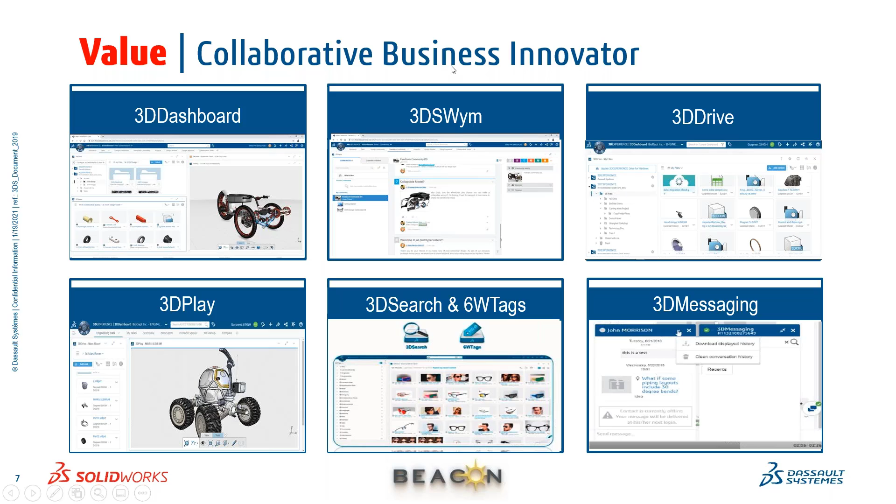So what is the 3D experience platform? I'll take you through it live. Let me switch to my browser first. As you can see, I am on this particular browser, and one thing I want to emphasize here is that to work on this environment you don't need to have a full-fledged system to access the data, to view the data, to review data. You can work on thin clients, because the only thing required here is a good internet connection and a browser. So from the browser you can access the 3D experience platform through the 3D passport login.

Let me just log into my credentials here. So as I've logged in, this particular page would load up, and the first thing that I would see is the dashboard. So this is the 3D dashboard.

So dashboard is something where I can get a bird's eye view of everything: what are different activities that are going around my organization in different teams, or what are different tasks that are involved, what is going around the world with my vendors, with my competitors. I can get a complete feel from this particular thing. A single unit of data, a single unit of information, where you can find here, and you can have multiple dashboards.

So this is an example of a dashboard, as you can see here. I have this dashboard, and there is one more. You can switch between different dashboards from here. I can switch to this particular dashboard called the Resemin Bolter 77D design and development dashboard, which will focus on this particular webinar. And on the 3D experience platform, you have this compass, which basically consists of different roles, but we are focusing on this particular role called collaborative business innovator, which consists of all these applications.

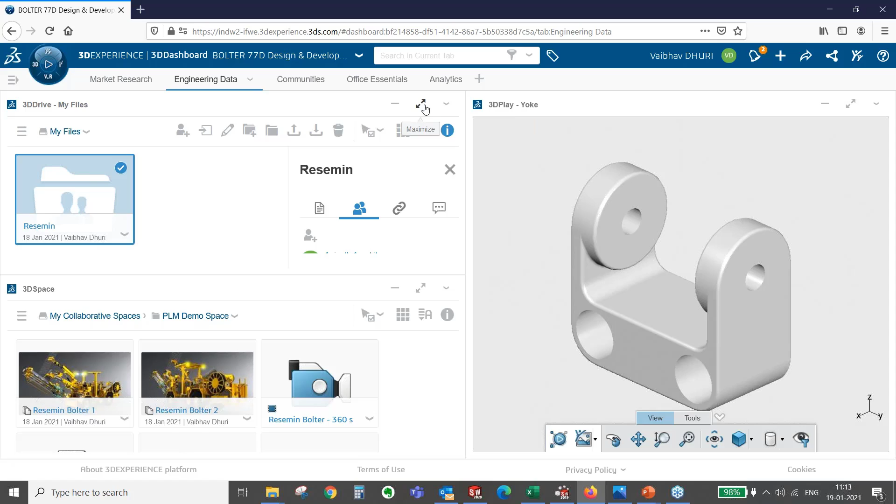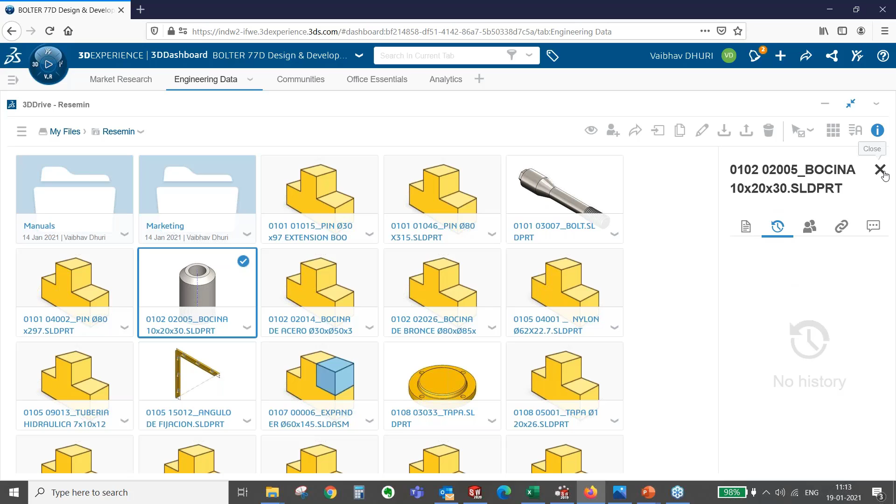At the same time, you can also access the data such as the parts. If you have a particular part, you can find the history of how that part was developed. There are different versions saved on the platform, so you can check what the previous versions are, and you can also access those previous versions, or replace them whenever you want. So these kinds of flexibilities are provided here.

Next application from the 3D Experience platform, which is very important, is 3D Play. 3D Play is basically a review application wherein any data from this 3D Drive can be directly opened onto the 3D Play application, and here any kind of design review can be done.

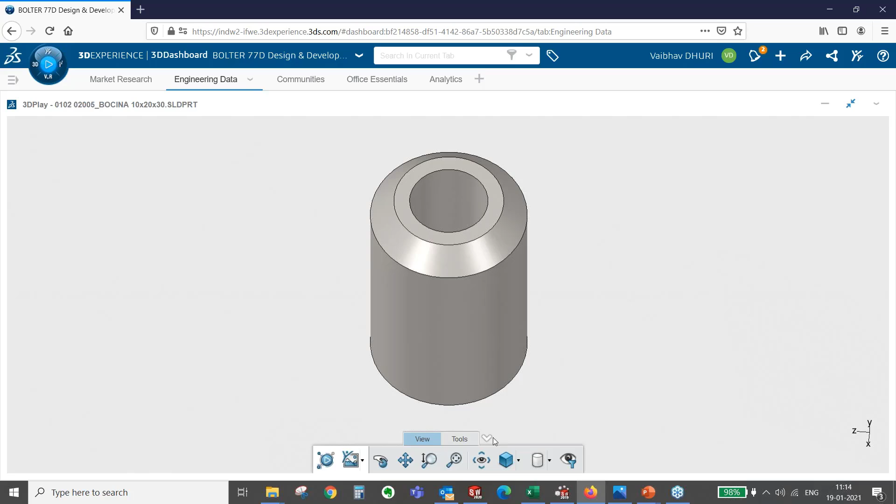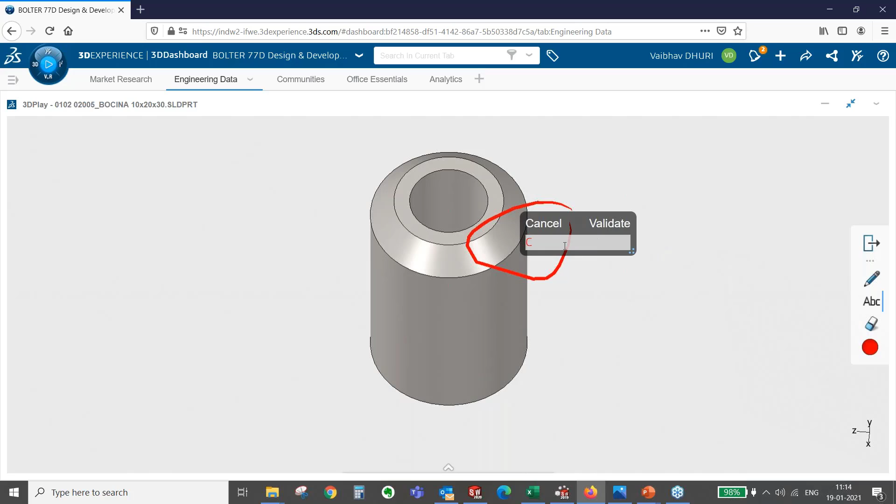Let me just maximize this. So you have full flexibility in moving, panning, zooming, rotating this particular data, and if you want to inspect this, we have this measure tool to quickly inspect it, and you can take different sections. You can add different markups. So any kind of design review can be done from this tool called 3D Play.

And the best part is, if there is any kind of markup or change, that can be shared through the collaborative environment with multiple users through the communities. Communities is something which the 3D Experience platform has - basically it's a social networking for your organization, done through this application called 3DSwym.

3DSwym gives you access to have different communities, similar to what we have on LinkedIn or Facebook. Basically, you can create communities for different projects or for different teams. As you can see, I have here a community called Design Team for Mumbai.

Basically, this consists of all my design team members from Mumbai. Now we were talking about a particular project here, the Resemin Bolter 77D development. Let's go through and follow up with all the activities we have done. So here, for the Resemin Bolter 77D, we have started the development, and as you can see, I have posted

a post here naming it as: a new NPD is required for roof bolters, and we can take references from the previous product ranges. I've created this post similar to what we do on social networking platforms, and I've also shared an image - you have the flexibility to share an image or video directly on the platform inside the communities. So I've shared a previous model of Muki AFF, a similar range of product from the same company, and we need to develop this Resemin Bolter 77D based on references from Muki AFF.

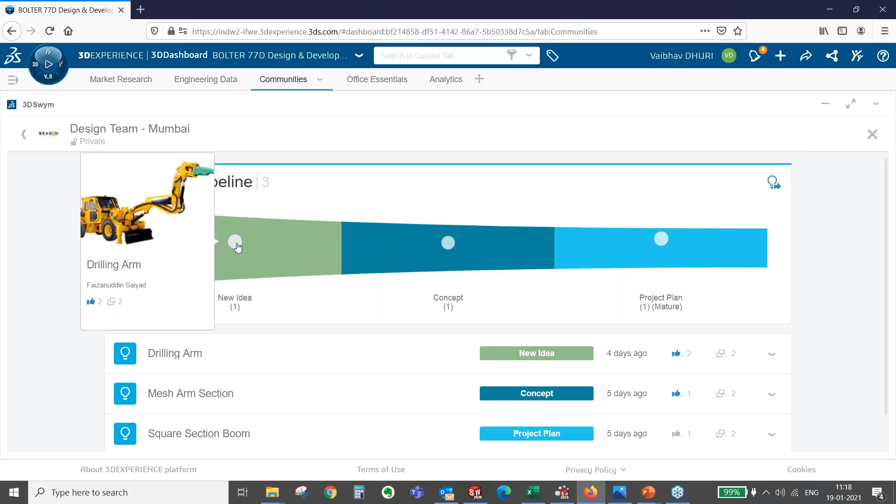If I check here multiple ideas, you can see this is the ideation pipeline, wherein I have this particular drilling arm idea by Mr. Faizanuddin Saiyad, which is still in the new idea stage. Then I have this mesh arm section, which is in the concept stage. And then we have this project plan idea, the square section boom. This ideation pipeline basically helps you to focus on the views of different team members and channelize them based on the need.

So there are a couple of ideas shared and a couple of comments. I can like those comments, I can reply on those. Apart from that, Mr. Faizanuddin Saiyad had posted that let us start working on the boom assembly, since we have developed all other portions taking references from the previous assembly. So he has given me a comment to please align all the tasks.

Now tasks can be aligned through the 'we do' task in the communities. So here from the Swym community we have something called 'we do task.' From this, I can add multiple tasks to different team members. You can see I've assigned a CAD model development task to myself, where we need to develop the knuckle for boom assembly, and now the task is in the to-do stage. We'll see later how these stages work.

Then I have assigned a task here to Mr. Anirudh Ayachit to check the previous design with respect to 175 kilonewton static loading. He has already completed this task, as you can see here. So these are the multiple stages: to-do, in work, or completed. When I'm going to work on a particular task, I can shift that to the in-work state so that all the assigners are notified that I am taking up this task. This helps you plan a project completely.

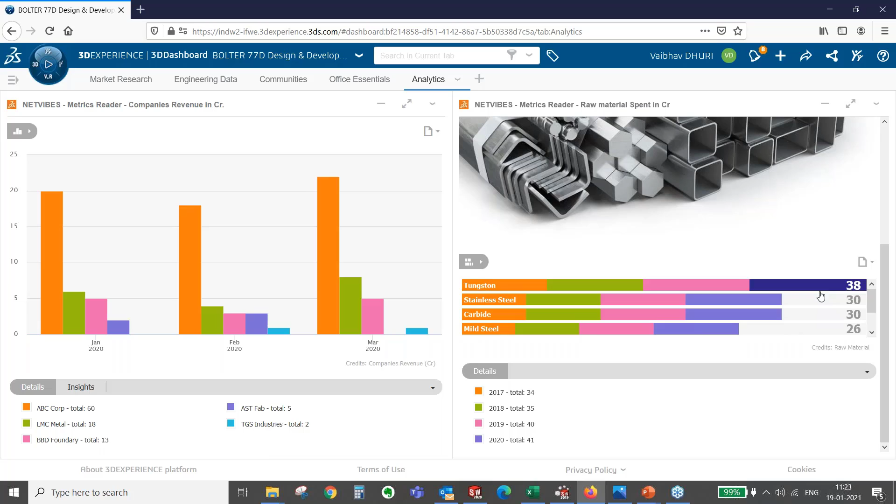I also have one more reader here, which basically states the raw material spent in crores over a few years. So from 2017 to 2020, how much we have spent on these different raw materials: tungsten, stainless steel, carbide. That is given here, and these insights can also be understood from here.

Let me switch back to my presentation. Now we'll see how we can integrate the 3D Experience cloud-based platform with the SolidWorks 3D CAD. We will start working with the part modeling and develop the knuckle.

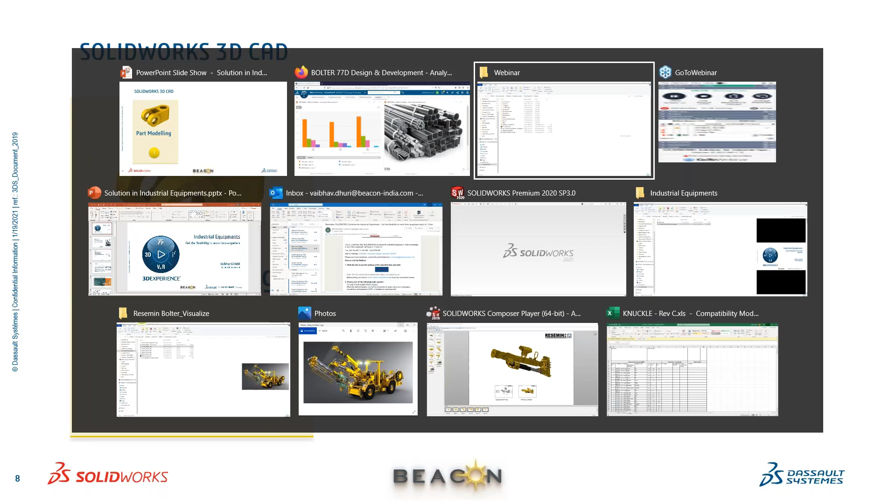Let me switch to my SolidWorks window. As you can see, I have my SolidWorks window here, and on this window, I have this 3DEXPERIENCE task pane, which basically consists of the same thing that I have on my browser. From this compass, I can access different applications, including the 3D drive, which consists all the data and different folders shared with my team members.

Something that would give me a bird's eye view is the tasks. From here I can actually access what my task is, and it helps me focus on a particular thing from the project. So here you can see I have this to-do task, which is the CAD model development.

While taking this task, I will transfer it by dragging this into the in-work stage. Every other member would be notified that I've changed that to in-work stage, so that I am assigning it to myself. I'm taking that particular task.

Now the different things I need to do to complete this task are also given inside the task. If I open this particular task, there's a brief description that I need to develop the knuckle for the boom assembly and the assembly as well. Here the community for this task is the design team community, and here is the priority, which I've now changed to in-work stage.

I can also work on how much percent I've completed this task, so that my design manager would be notified of what stage this is completed at. You can also plan the end date, so that after the end date, if I lag this out, I would be constantly notified that I'm lagging on my task. Now let us go ahead and drag this.

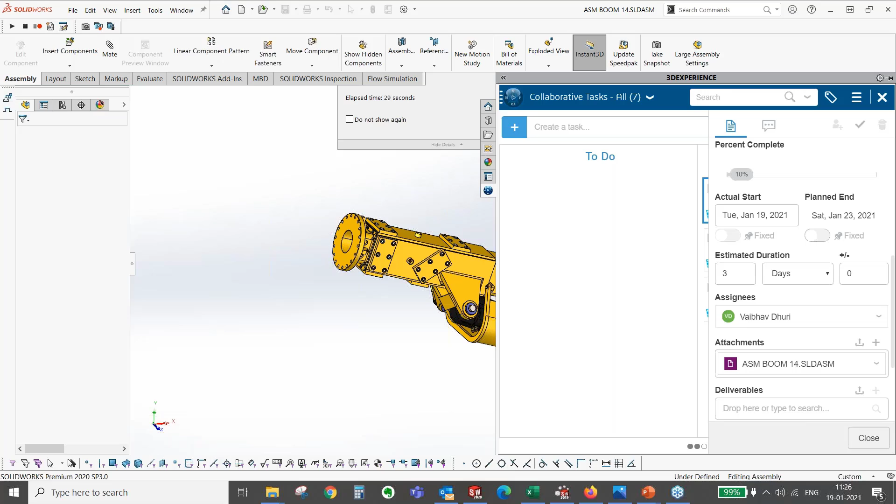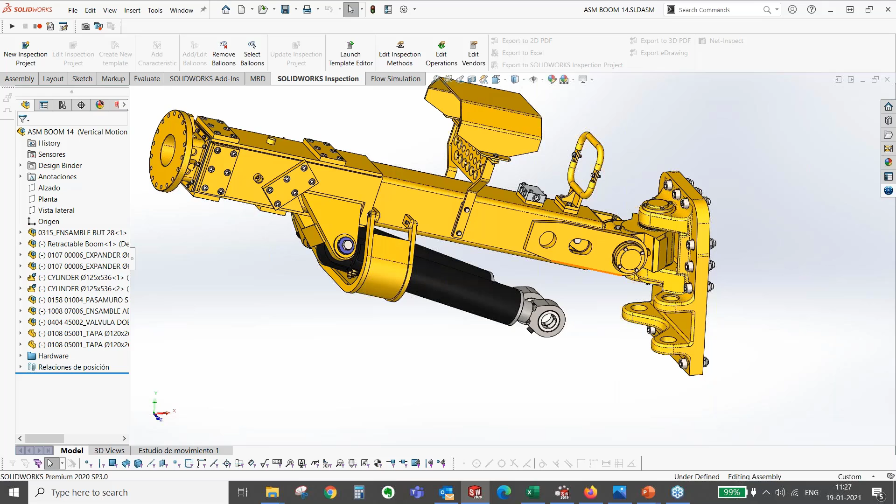As you can see, I've opened this assembly, which I need to work on, and it's still given inside my task pane. From here I can access this data, so let me just hide all the content. Here I need to develop this knuckle.

Let us take a reference from the boom assembly: a knuckle with an ID of 65 mm. Let me develop a new part here, taking a particular template.

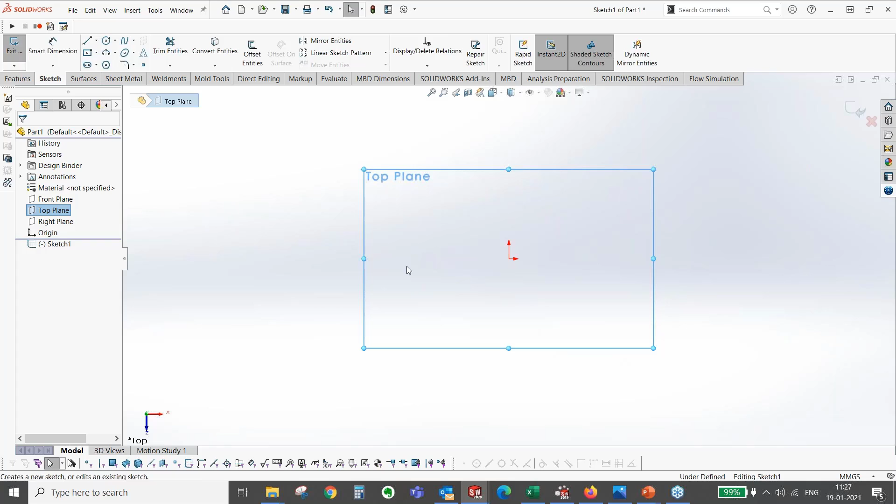Here I'll just develop this particular sketch on the top plane. I'll add a circle here of 65 mm and an outer boundary of, let's say, 120 mm.

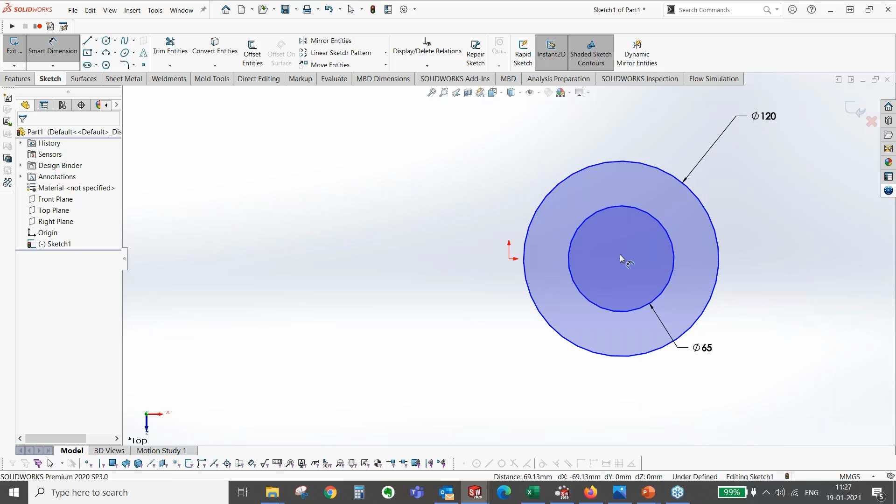I'll just move this here, add a constraint here, and then exit from this sketch and directly convert this into 3D. I'll just extrude this out, and let's say about 125 mm would be fine.

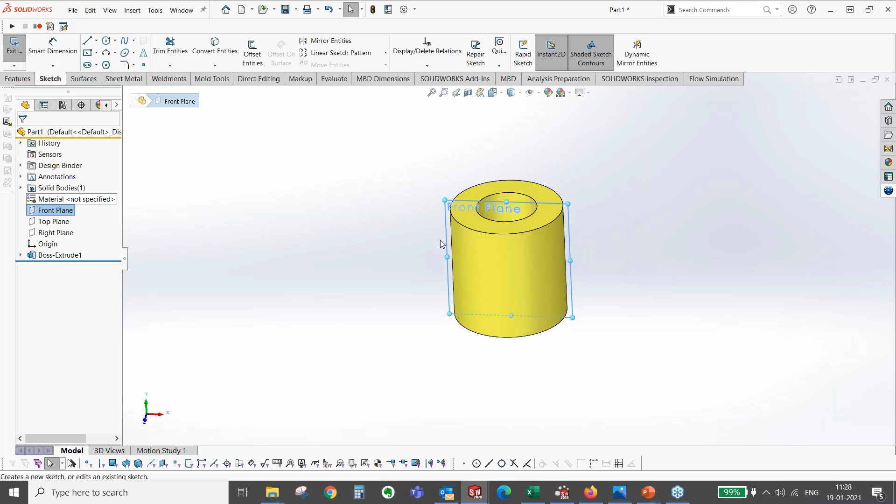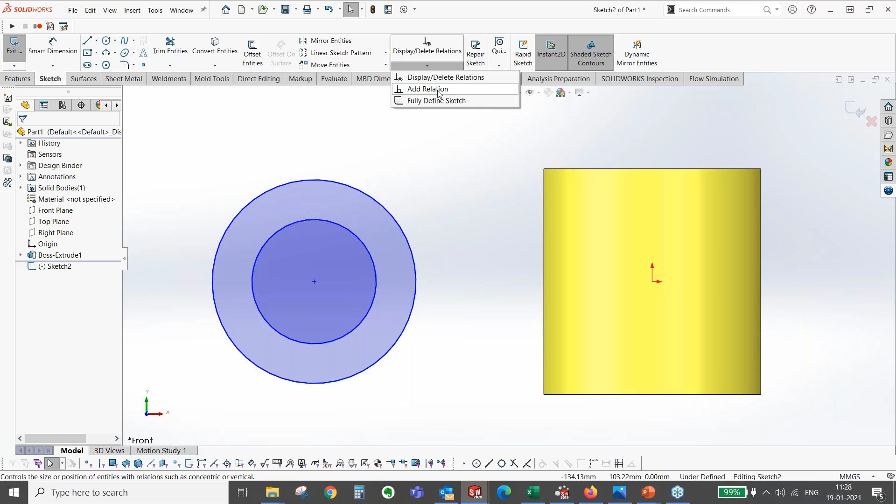I'll sketch on the front plane here, adding two more circles, concentric, and instead of creating the dimensions manually, I'll just go into the fully defined sketch and all the dimensions would be ready on my screen where I need to develop them. I'll make the inner diameter 65, the OD 120 mm, and this distance about 165. So I've added these dimensions.

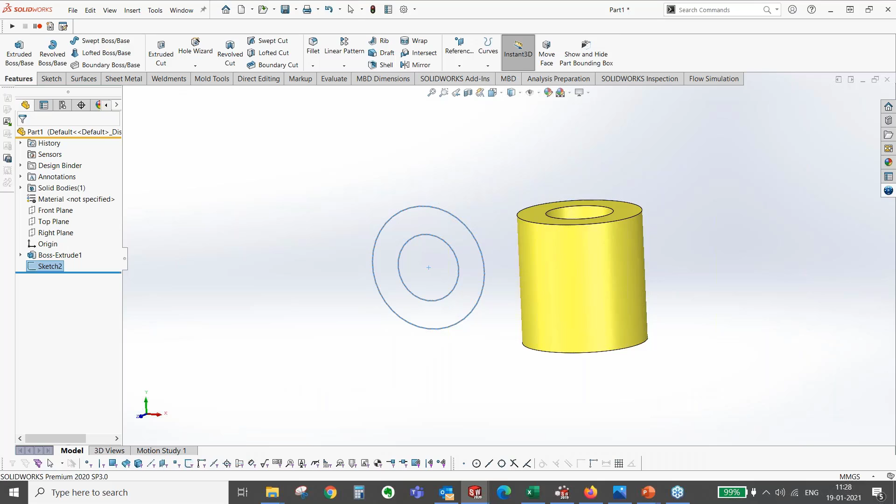Let me go ahead and convert this into a hollow cylinder. I'll just switch this, and let's say I'll put this about 150 mm. Now these are two cylinders, and I need to connect them.

So I'll start working on the top plane again. I like to work with center lines, so I'll just add these center lines here.

Okay, a horizontal one and a vertical one, and then taking references of this, I'll just select this particular edge and convert that into a circle, so that anytime this particular entity changes, my sketch reference would also change.

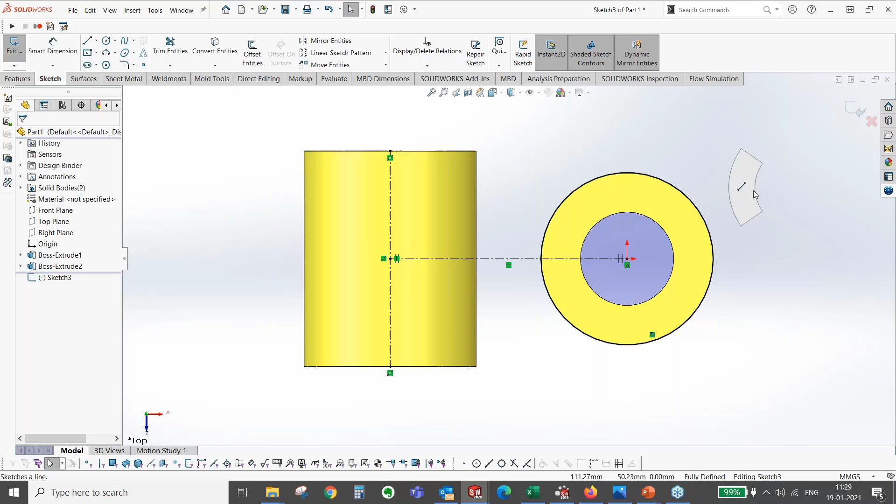I'll add one more line here. Before going to that, this dynamic mirror entity would help me mirror out sketch entities. So I'll just choose this particular line here, and as you can see, this is being mirrored directly.

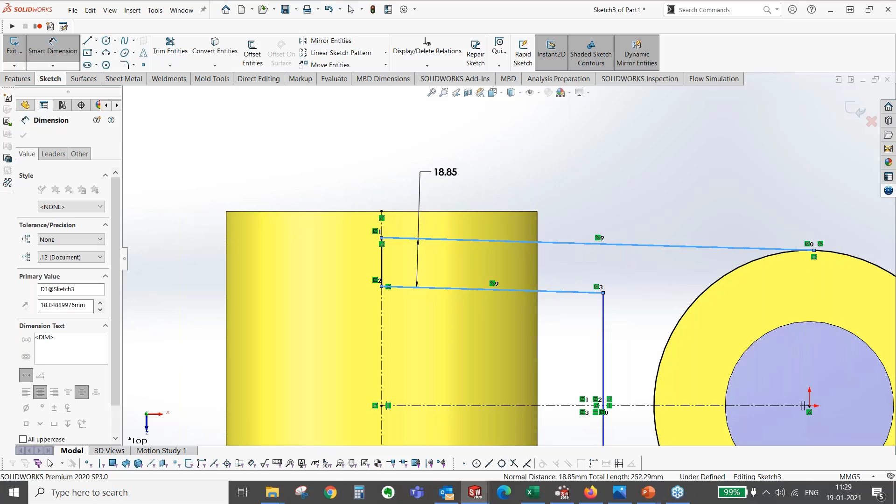And taking the vertical reference, I'll just add this here. Afterwards, I'll add the distance between these two as 25, the angle as 4 mm, 4 degrees, and this pocket depth maybe around 90.

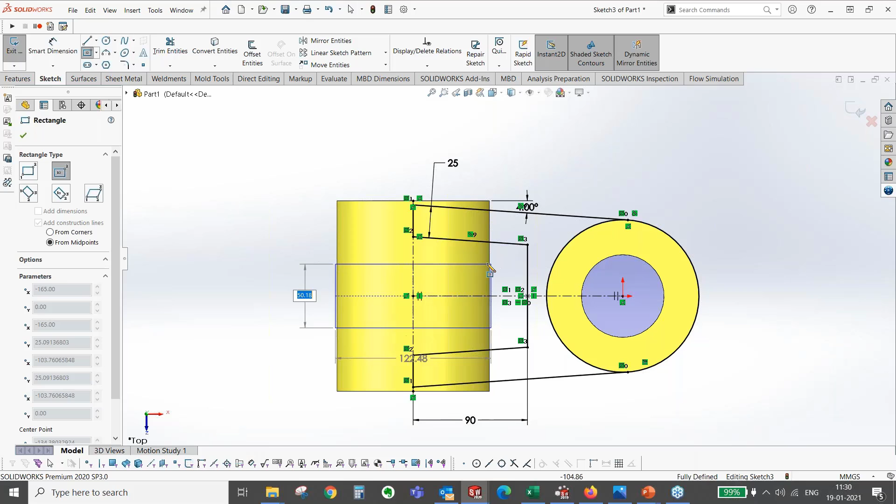As long as I've added this, I can also add a few more entities like a rectangle here, snap it to the silhouette edge, and enter the dimension as 70. Afterwards I'll exit from this particular sketch.

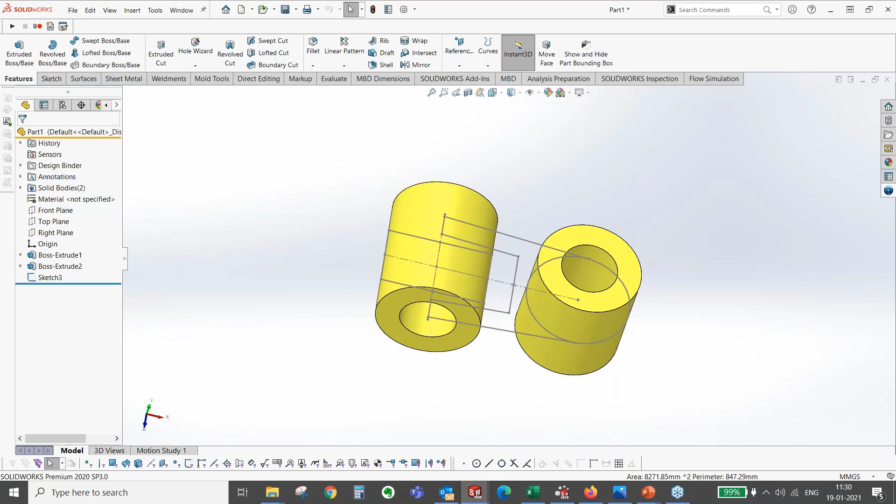Now the regions, even those regions can be selected directly from the contour selection tool, and that can be extruded. So I'll extrude this by 120 mm.

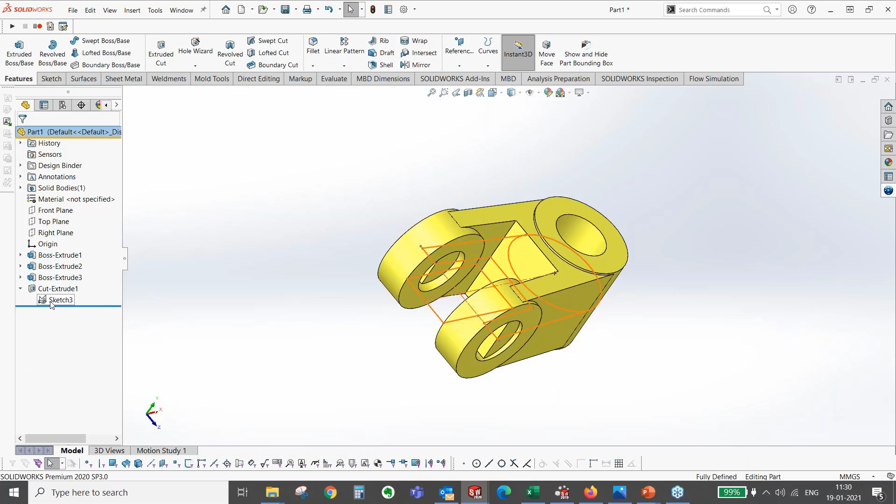Here I'll use this pocket to convert that into a cut, using the both side options to cut it through all. I'll hide this sketch for now. Here you can see that SolidWorks has completely created this particular thing with that single sketch.

As you can see, for this rod eye, I have to remove these portions to insert the rod eye here. This can be done with an extrude cut, but I'll use the delete face functionality of SolidWorks to quickly fix up this area.

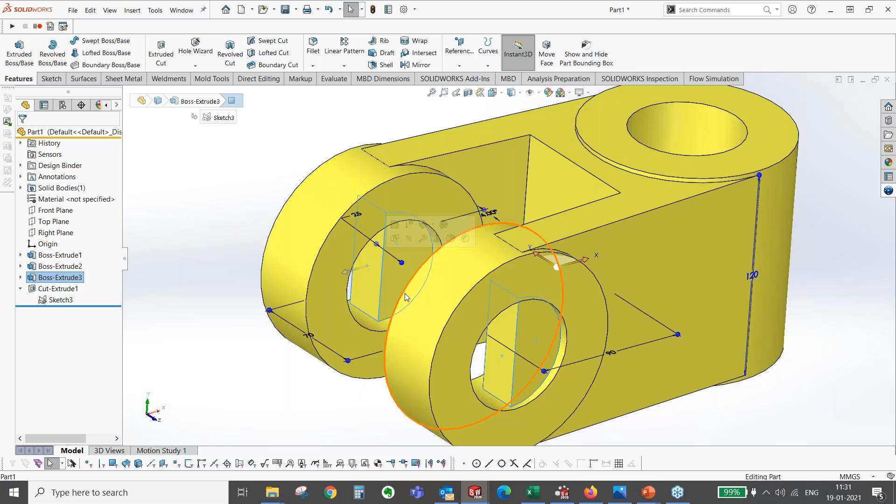So I'll select them and go into the faces option and delete them. Here it will not only delete but understand the geometry and patch it up nicely.

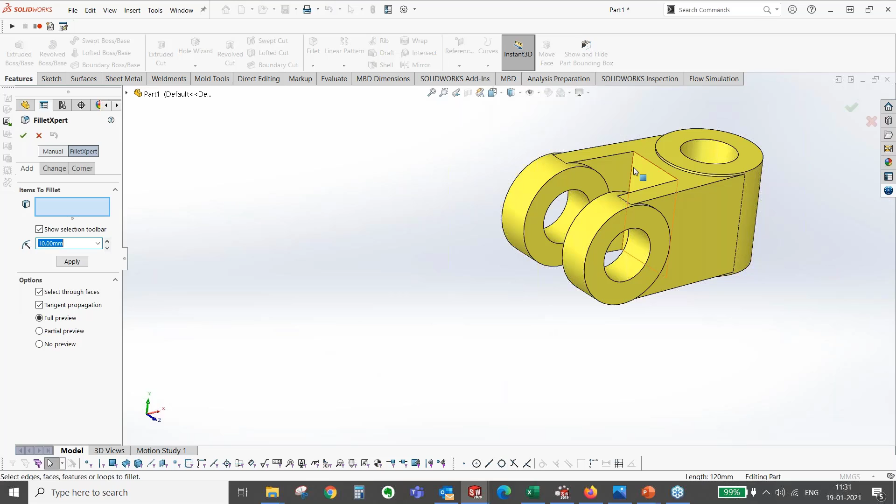Finally, the sharp edges can be removed by using fillets. So if I go into the fillet command, I can select these fillets, and with this selection helper, I can quickly select all the concave edges and apply those.

And if there are any kind of referenced features, even those features can be directly added here. I'll just make this a little short.

From the design library, I can access different components, different features, different smart features. So smart features are something like where I can import a grease fitting port from a previous component directly onto this new component. Here I need to specify a particular configuration.

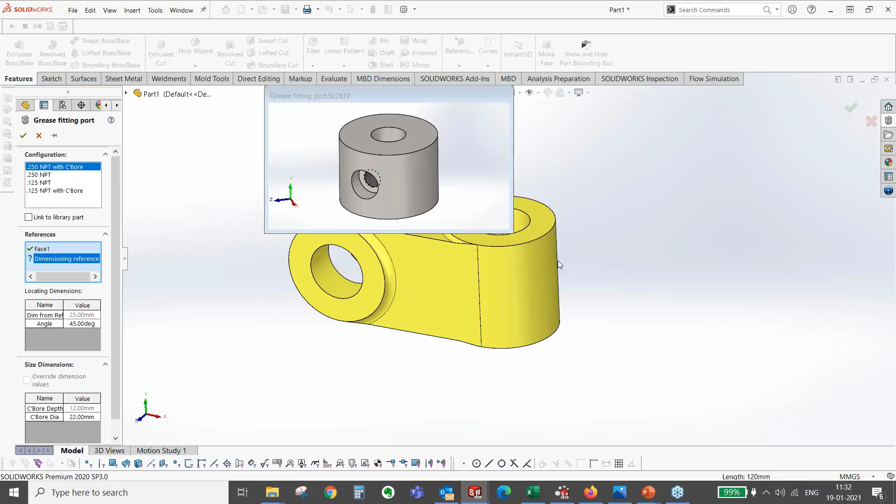So I have a quarter-inch counterbore port, and the dimension reference should be from this particular face. I'll enter the total height as 125, so we want it at the mid plane, and angle I can change to 60 degrees. These kind of smart features can be quickly added to shorten the design time cycle.

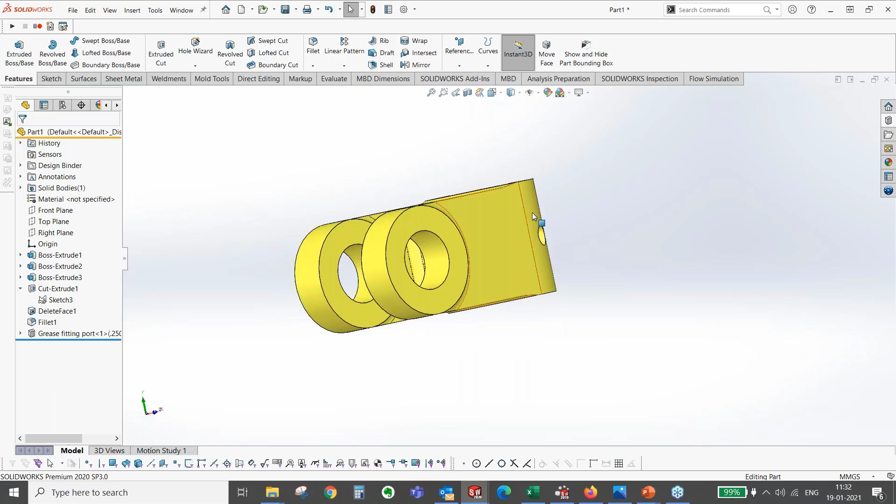Once I've added that, I'll add a material to this to give the physical significance. So here I'll choose AISI 1020. As you can see, it not only adds an appearance, but you can also calculate different entities such as weight, mass, volume, etc.

Depending upon the material. Let us go ahead and save this part. I'll save this inside my local drive as knuckle. I'll just save this.

Here, if I wish to upload this, now I can quickly upload this onto my 3D drive. Let me just close this for the moment.

And here on my 3D drive, I can quickly upload this assembly, this particular part. Once I've uploaded that, all other members who have access to edit this particular thing will be able to make changes to this file.

So here I have this add option. Let me go ahead and close this for now.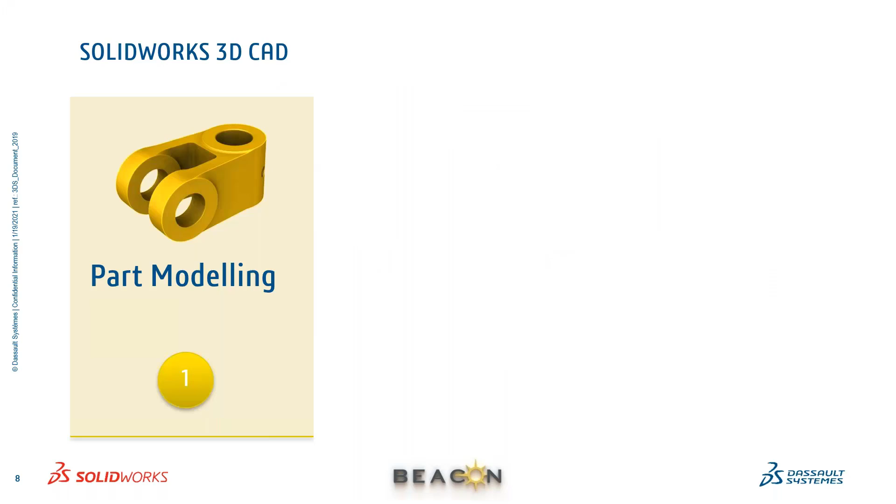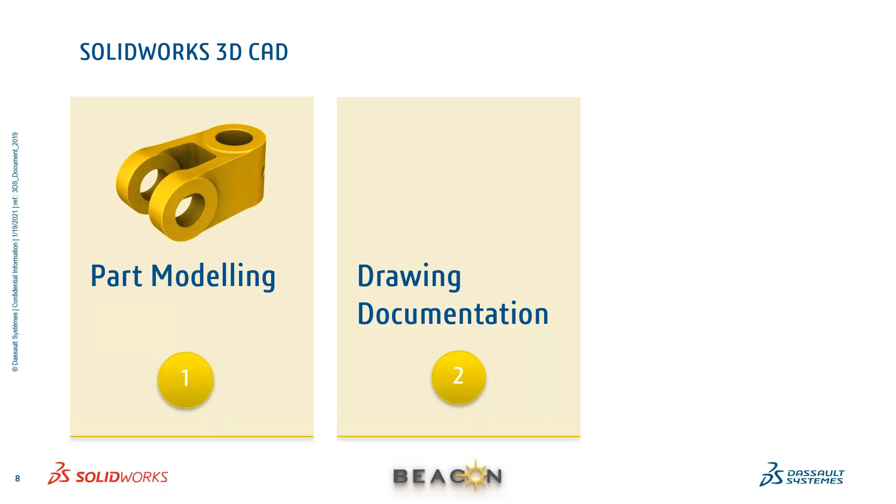So we have seen how we can develop this part. Now we'll see how we can document our drawing here in SolidWorks. I'll open the knuckle again, go into the make drawings from this part, and create a new drawing.

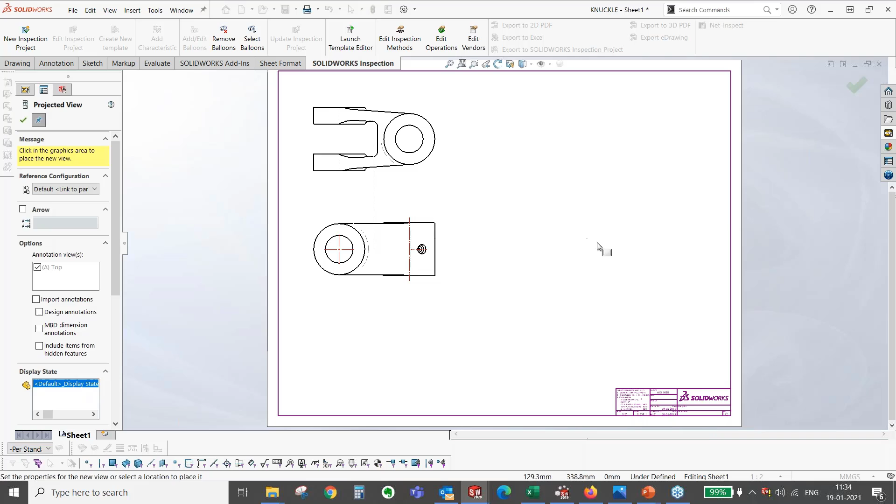Here I need to specify a particular template for that. From the view palette, I can quickly import different views that I need. I'll import a front view here, a top view, a side view, right view, and add an isometric view as well.

If I need to remove some entities, I can remove those. I can change the display of this view. If I want to add different annotations, I can quickly add the dimensions.

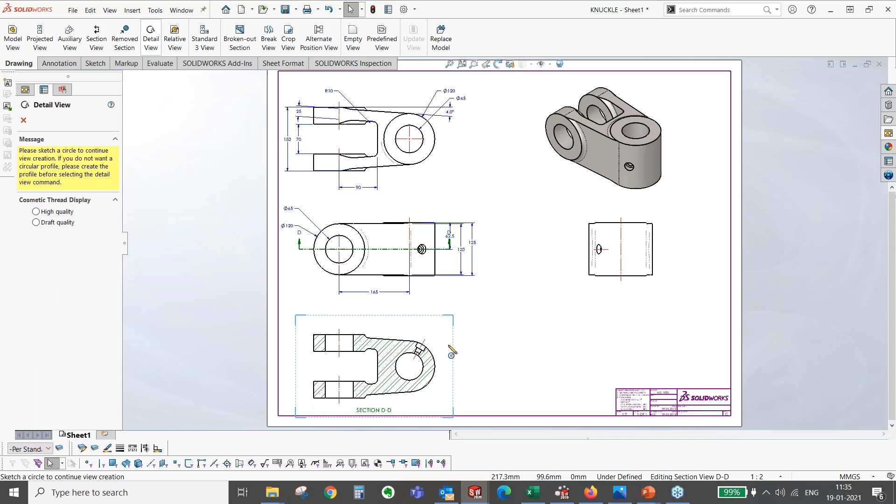If I want to take a section view as well, even that can be done quickly by using the section view option. I'll select it here and I have it ready on my screen. And then if a detailed view is required, even that can be added - just snap it here and a detailed view can be easily placed. And even this one is dynamic.

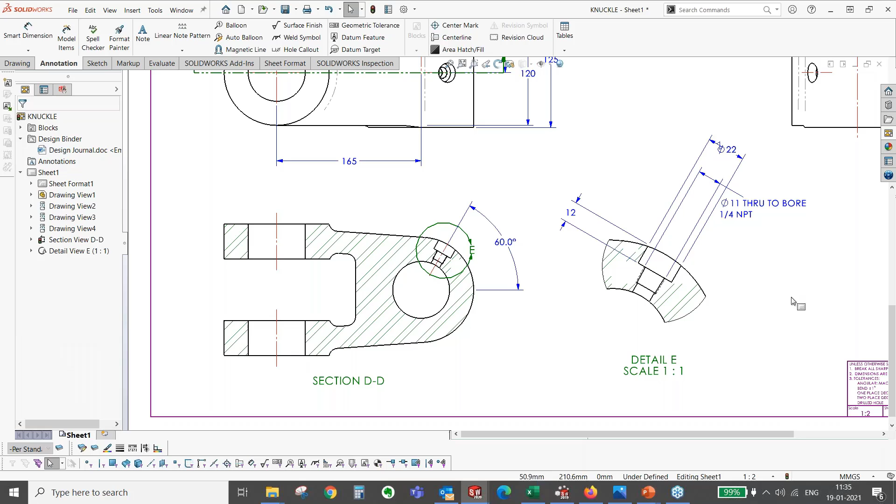And to add the dimensions related to this view, I can go to the model items command and add all the dimensions. So you can see my complete drawing is ready within a few seconds. I can just save this drawing and move ahead by saving it onto my 3D Experience platform.

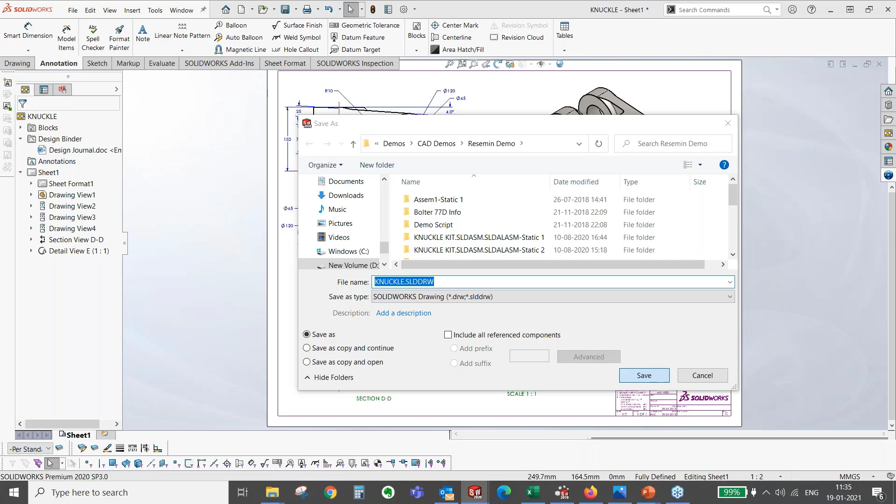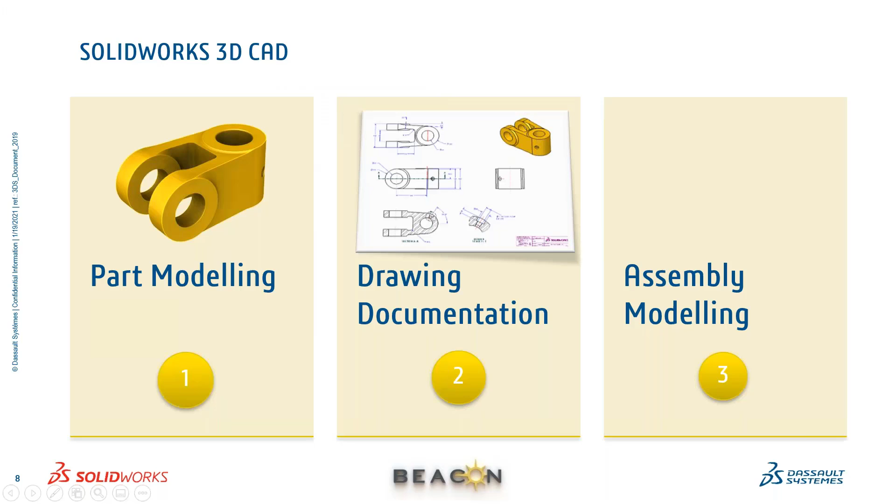So let us save this. Now I'll just close this for the moment and go back to my presentation. So next we'll see how you can model the assembly.

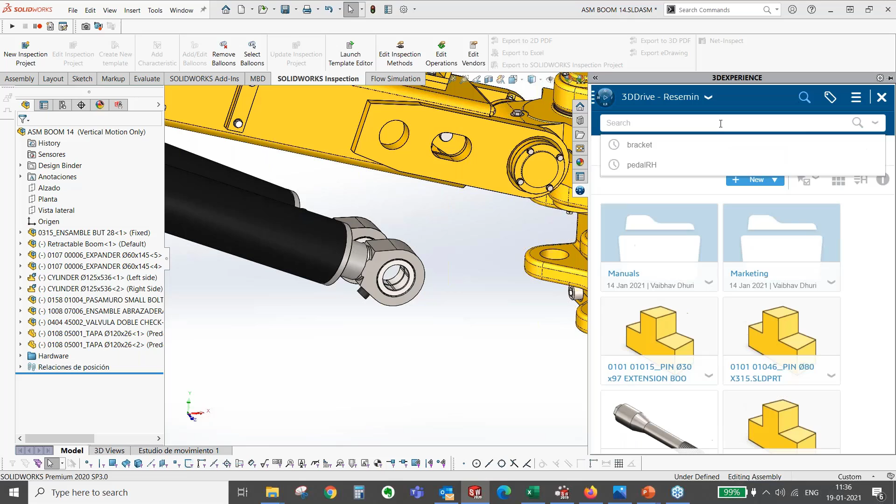To model the assembly, I will call all the components here, and from my 3D Experience platform I can access the 3D search. So here I can find the knuckle kit.

So these 6W tags would actually help me in filtering out the data with respect to where that data resides, what the data is, when it was created or modified, and who was using that particular data. You can see the geolocation, the source where it was stored, the type of data, and the modification date. So these would help me filter the data from the 3D Experience platform.

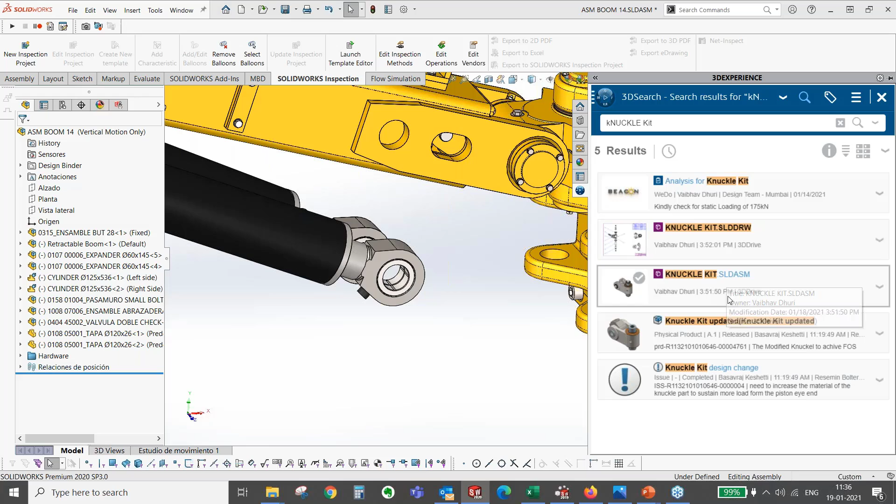So here I have the knuckle kit assembly in my 3D Drive which was created. I'll just import this. So now I am accessing the data from my cloud platform onto my SolidWorks here. So your SolidWorks is connected to the 3D Experience platform.

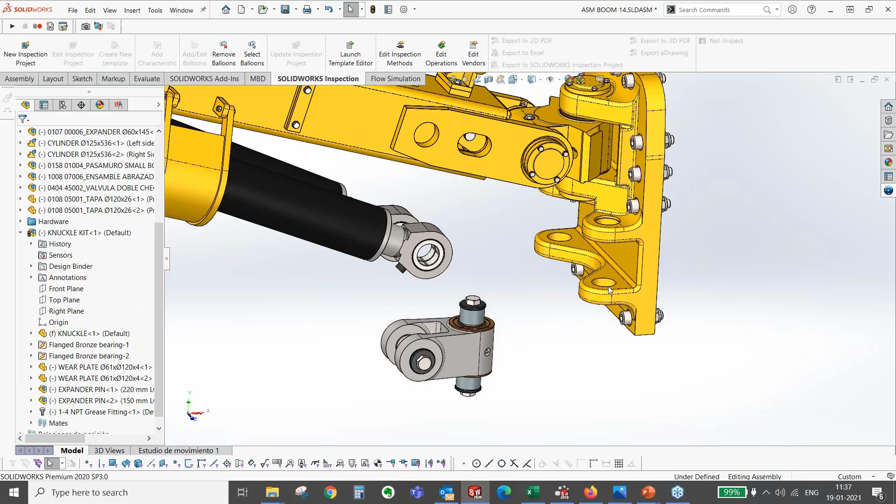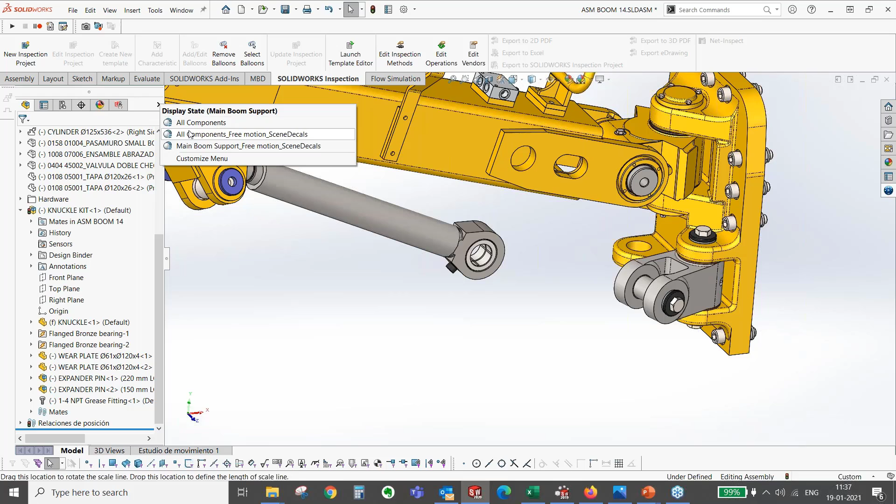So what we'll do is move this out and add a mate between this. I'll call one more entity here, one more replica of this knuckle kit. I'll add one more mate, and just reverse this mate out.

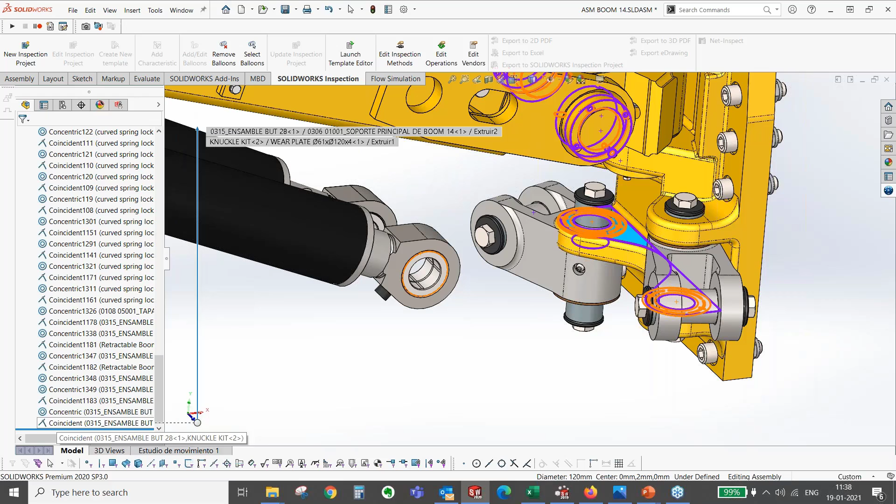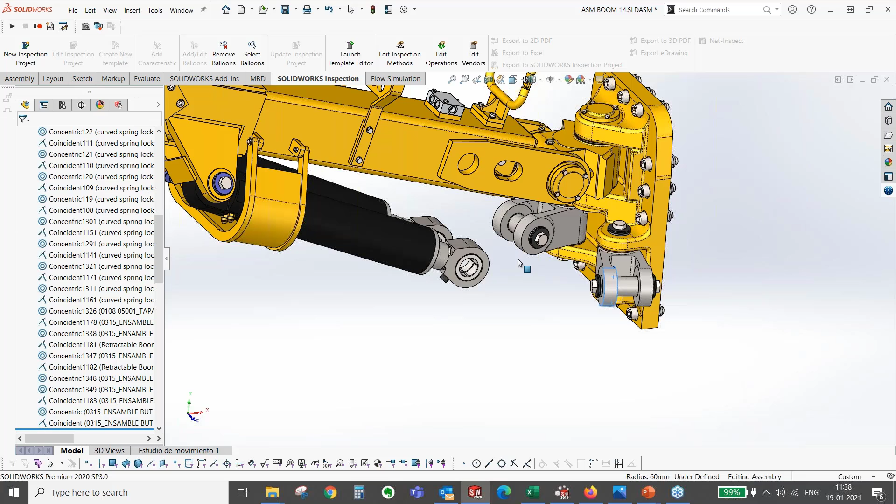So you can see that I've added these mates here. Let us go ahead and add the rod to these knuckles. Let's pull this a little bit out. Snap this here.

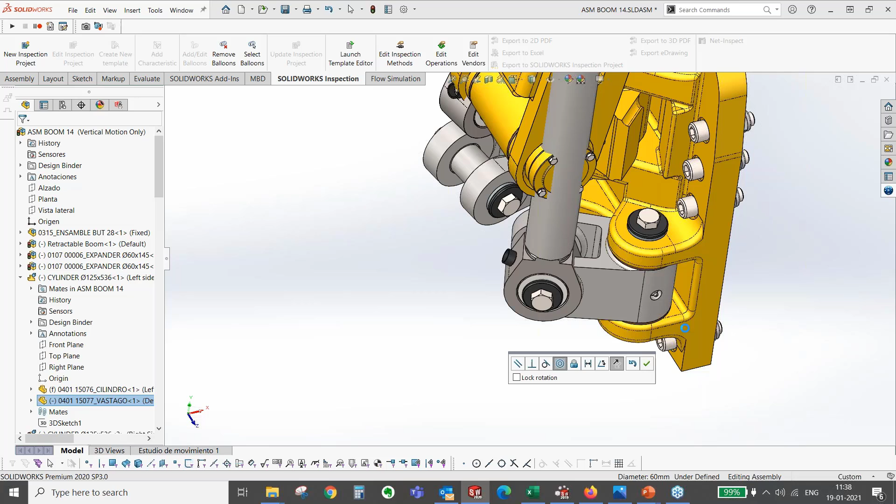So basically, the whole idea here is to work in a connected environment, where you can import the data directly from the cloud storage, from the 3D Experience platform, which is shared in a collaborative environment, and multiple people can work on different assemblies, on different projects on it. So let me go ahead.

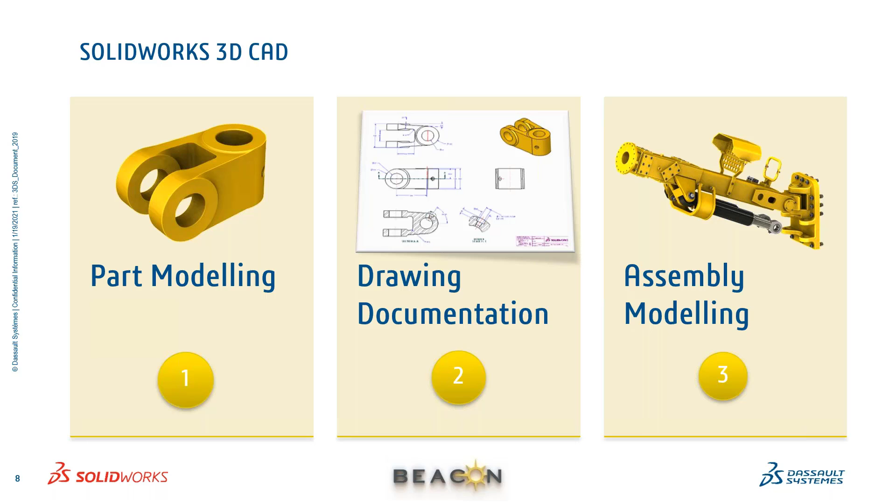Then for the technical documentation, as we have already seen, I have these tasks listed out in my community, which is having a Resemin product manual. So let me just open that.

So you can see here that this was assigned to Mr. Faizuddin Sayyed, and he has completed 60% of it. Now why is it 60%? Because we are still working on the CAD model development. So once the CAD model development is completed, this will be synced, and this task will then be completed.

So let me go into my task. I just complete this as I've completed that particular assembly, and that is now shared on the 3D Experience platform. So I'll just complete this task. Once this task is complete, it is shifted to the completed stage, and everyone would be notified.

And here, as Mr. Faizuddin Sayed has also completed this task, he must have uploaded this particular thing. You can see here, so I'll just preview this, and that preview would be opened into the 3D Play application, where I can access that particular product manual which was created using SolidWorks Composer.

SolidWorks Composer is a great tool in terms of creating interactive product manuals and assembly instruction manuals. So here I have an example for that, which is now being accessed from the 3D Experience platform.

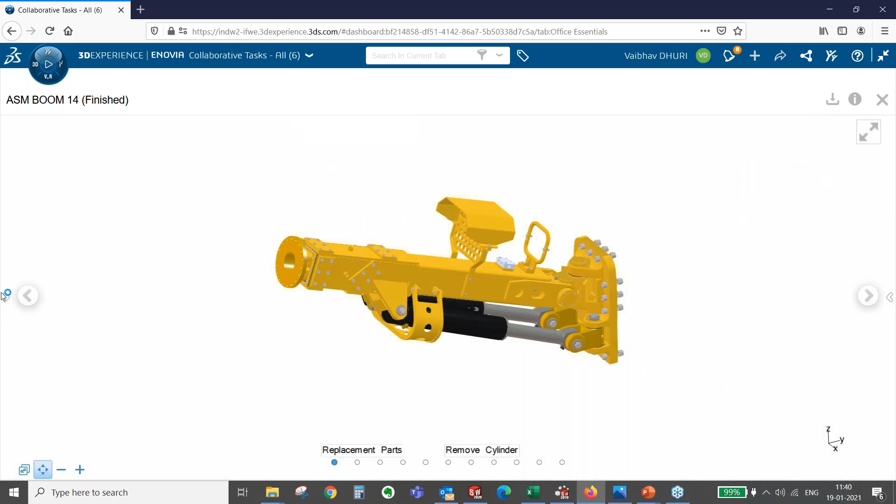Here I have different ways to access this data. You can see an animation which is embedded inside that manual. I can switch to different views which were created.

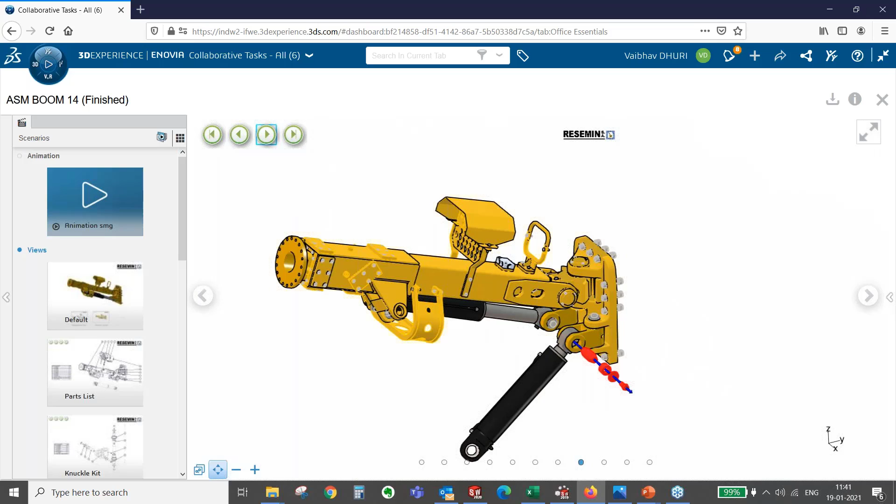So if a consumer wants to remove a particular cylinder, these are the different steps he can go through: removing this expander pin, then pushing this out, turning this out, removing the expander pin again, and then removing the cylinder out. So these kinds of instruction sets can be directly created through SolidWorks Composer.

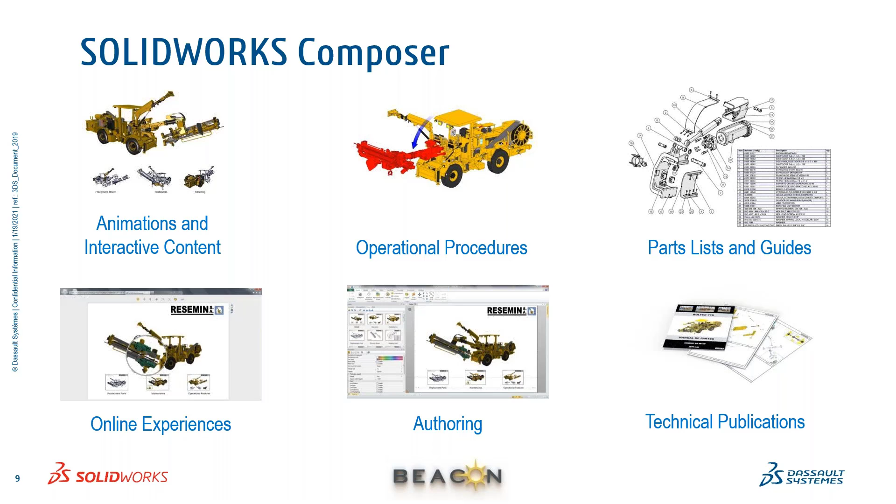And it doesn't only do this, but there are a couple of other things that can be done, such as animation, interactive content, operational procedures. You can also include part lists and guides. Even the content that we have seen on the platform can be sent to the consumer offline, as well as put on your websites. And we can also have technical publications.

So moving ahead, then we have the SolidWorks Inspection tool, which basically helps you in streamlining the complete inspection process in terms of developing the inspection reports. So you can automate the development of the inspection reports through SolidWorks Inspection.

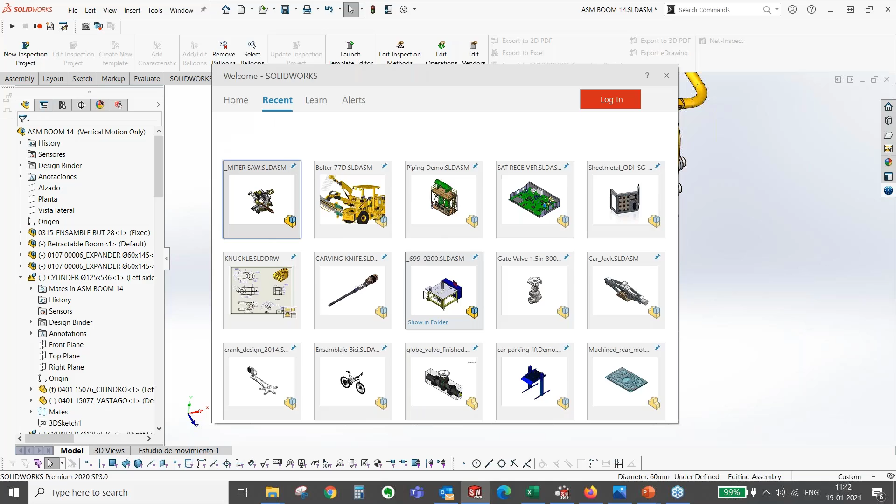Let me just give you an example here. So I'll just open a particular drawing here.

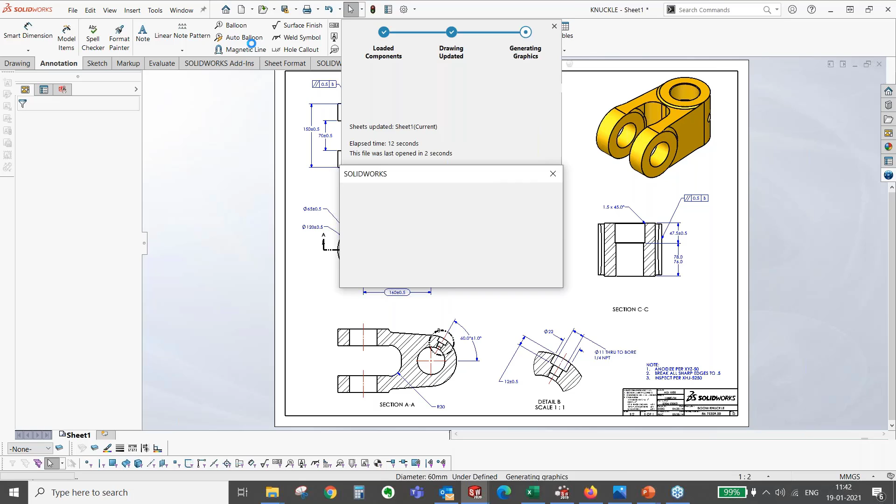So here on my SolidWorks, I have this SolidWorks Inspection tab, and on my inspection tab I can create a new inspection project. Here I can take different templates, so I'll just accept this template.

Here I can specify the part name, and it automatically reads the custom properties from the document. So I can enter the part number directly, a revision, document name, and a couple of other things. I can also specify the vendor and the job number. Any other custom properties such as weight, or checked by, created by, can easily be added.

Next, I can include what all dimensions I need to balloon out, and that would be included in my characteristic tree, so I'll just select all those. Here I can specify all the default tolerances in linear or angular medium, and just hit OK. So the complete drawing will be ballooned within seconds. This is a very tedious process to do manually, but this automation is really helpful.

You can see each of these characteristics, and that can then be exported. This document can be exported as a 2D PDF, including the balloonings, and you can also export this to Excel in different formats. There are some industry standard templates already included, and you can also create your own template and export that. So I already have exported that, let me just open it here.

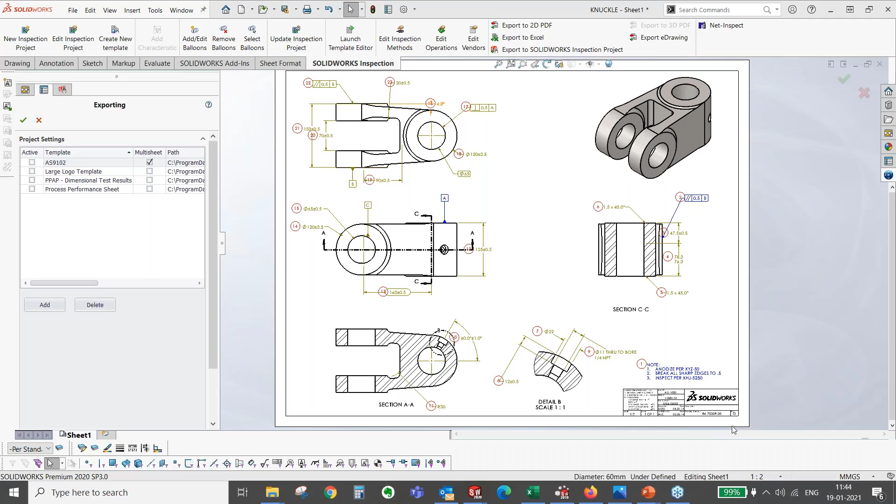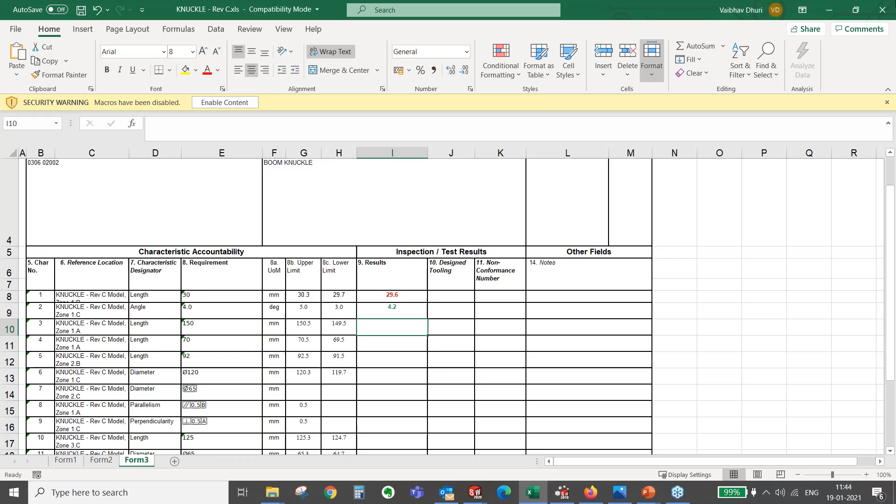Here is the document which was directly created, and then I can inspect the results. Let's say 29.6, and you can see here. So basically, to streamline the complete inspection process, reduce inconsistencies, and also improve time to market by shortening the inspection process, you can also use digital calipers and other tools, and this can be connected to the CMM system.

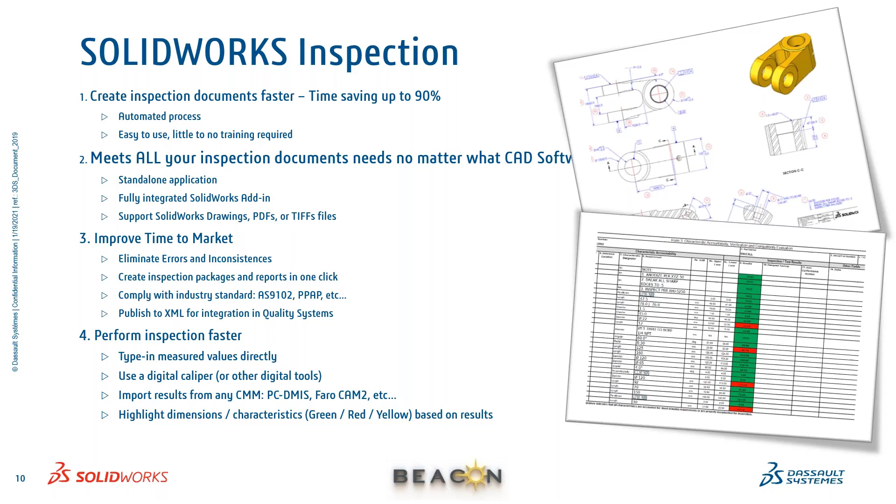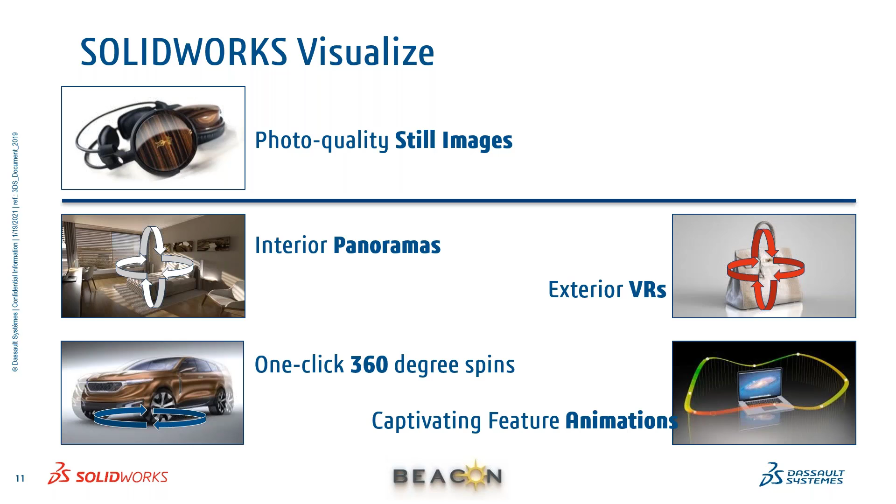Next, we'll see how you can develop marketing content for your equipment using SolidWorks Visualize. SolidWorks Visualize is a great tool for creating photo quality images with high definition renderings. So you can not only go for still images, but also develop interior panoramas, exterior VRs, one-clicks, 360 degree spins, and rendered animations as well.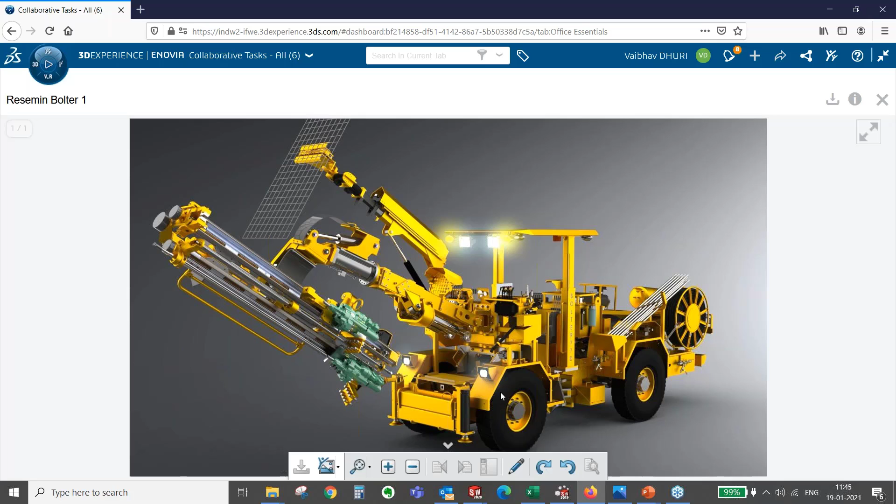So I can go into my platform here to see this particular task which was developed for the marketing content, and here Mr. Faizan has already shared the marketing images. I can simply open this by previewing it here. These kinds of renders can be created from SolidWorks Visualize, which should help you in terms of marketing, creating marketing collaterals. So these are some examples.

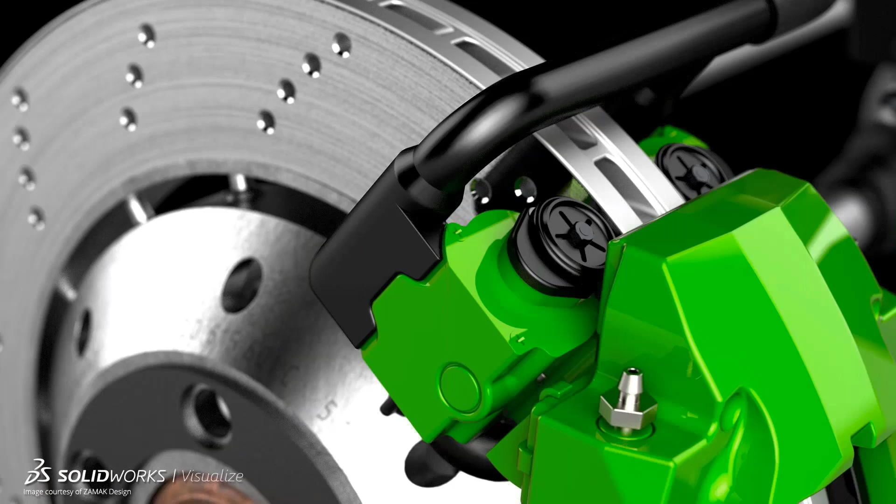You can also create 360 degree spins, interactive content for web portals, and online experiencing.

So finally, when the tasks are completed, they can easily change the percent of how much that was completed, and they can close it or take it into the completion stage, or they can also comment. Like if I want to comment here, they would be notified with my comment, and we can take it further to the completion stage. So basically, this is a complete connected system for a collaborative environment with the amalgamation of SolidWorks and the 3D Experience platform.

There is this future roadmap where we have a couple of cloud-based design tools. So now you can not only access the data or collaborate on cloud, but you can also design on cloud. For this, you don't need any high-end systems. You can directly work on your thin clients, tablets, to develop your designs, assemblies, and integrate complex designs. These are some tools: 3D Creator, 3D Sculptor, and Sheet Metal Creator, which can be directly used on touch devices and thin clients. Only thing you need is a browser and a good internet connection.